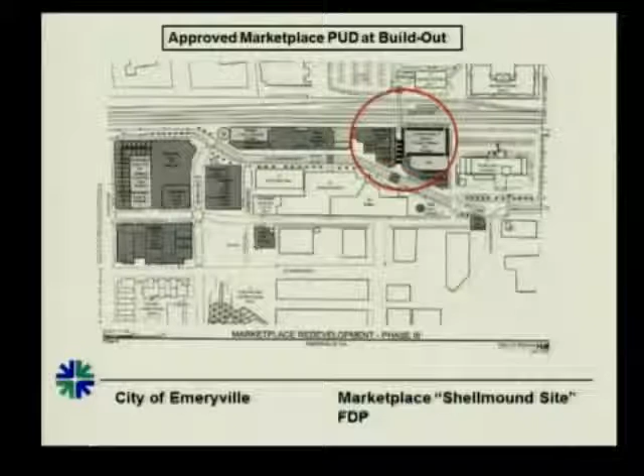Okay, good evening again. So this is Shellmound site, or Parcel A. The railroad tracks are right there, and you have the Shellmound Street. It's positioned in the approved Marketplace PUD at build-out, so it's fairly consistent with that in terms of location size. Everything, we've gone through that before.

So in terms of the changes that have occurred since the last study session, which occurred in January, the basic layout remains the same, and the basic circulation remains the same. So you've got Shellmound at the bottom. So there are two vehicular entries on the north and the south end, and the main lobby occurs along Shellmound.

As you would recall, we have about 14,000 square feet of ground floor retail, and a little under 200 units on top of that. And the building is divided. It's the same thing. The southern portion is 50 feet, and the northern portion is 70 feet. So, like I was saying, the circulation remains the same.

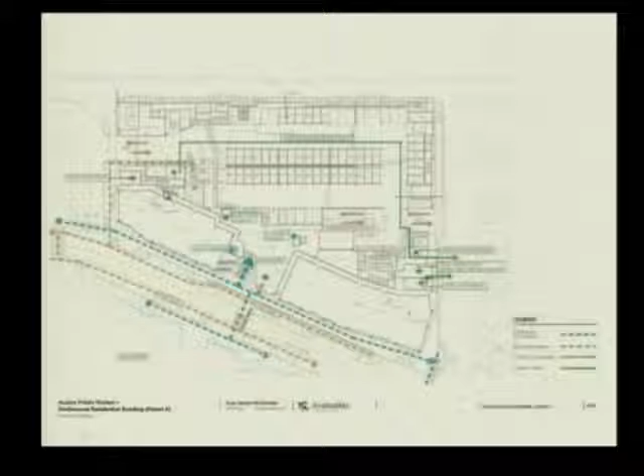We have loading and trash collection occurring on the northern end. The pickup and the loading will occur for both retail and residential on the southern end, and there will be room for trash on both ends. And the green line kind of shows how the trash would be moved from one end to the other.

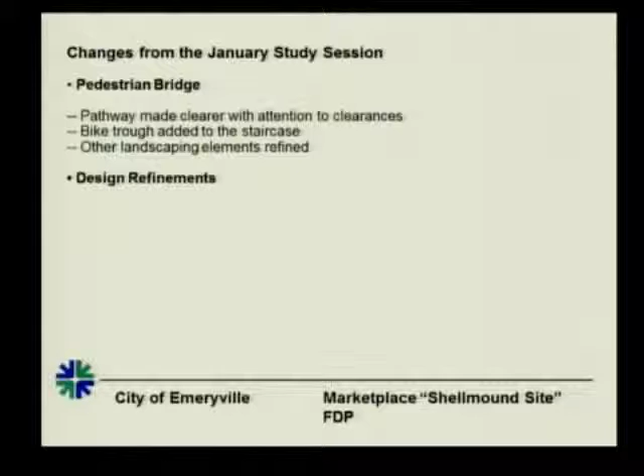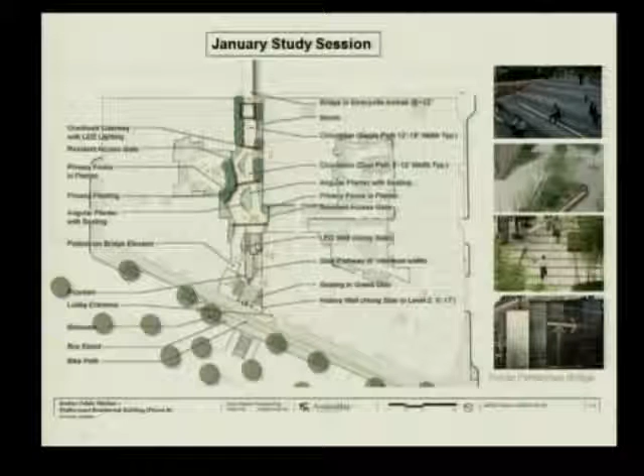So this was at the January study session. This is the pedestrian bridge. As you can see, here's the staircase. And one of the comments was that as you climb up the staircase, there wasn't a visual connection to the other end because of various landscaping elements. So that was one of the main comments, and this is also the January study session showing landscaping at the different podium level courtyards on the two buildings.

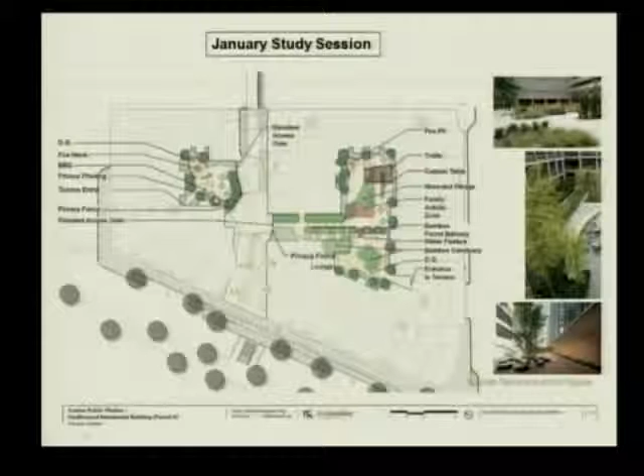These have been further refined, and so the current proposal is this. So here's the staircase. They've introduced the bike trough that goes all the way up the staircase. The seating on one side remains, and as you can see, the landscaping in between has been removed, and as you reach up, you have a fairly straight eyesight to the end of the bridge. Some of the other things remain the same.

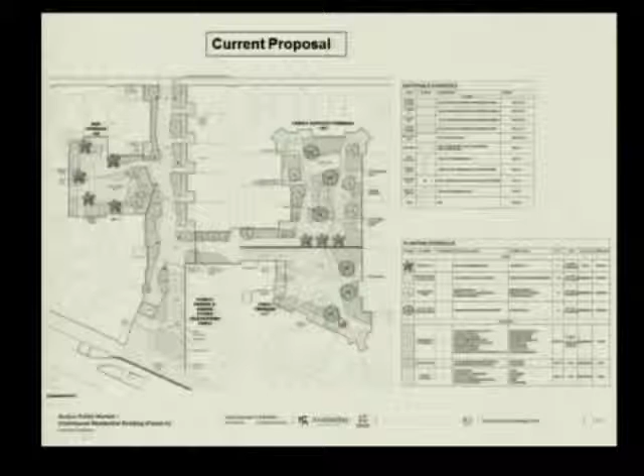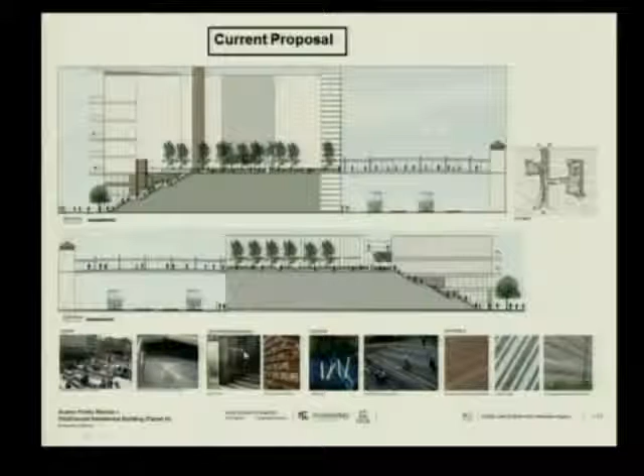These are 5 townhouse units opening up to this walkway, and here is one unit which also has a patio lining the walkway. There are more refinements in terms of the various species of planting materials, and also the different courtyards here. I'll come back to the courtyards in a minute. So here is the bridge walk, and the bottom tells you the images of the kind of seats that will be introduced, the bike troughs, the signage at the staircase level, some lightings, and the materials.

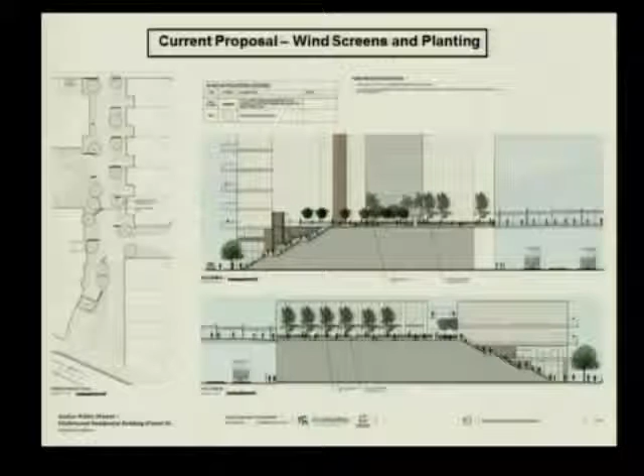What they have also added and changed since last time are windscreens. So these dark lines are the proposed windscreens, which would be about 8 feet in height, and about 30 to 50% porous. And the plantings also would be the kind that would mitigate winds along this corridor. So that's something that they have added and studied further. And I believe they're doing another wind study to nail down the exact species which would work to mitigate the winds going through this corridor.

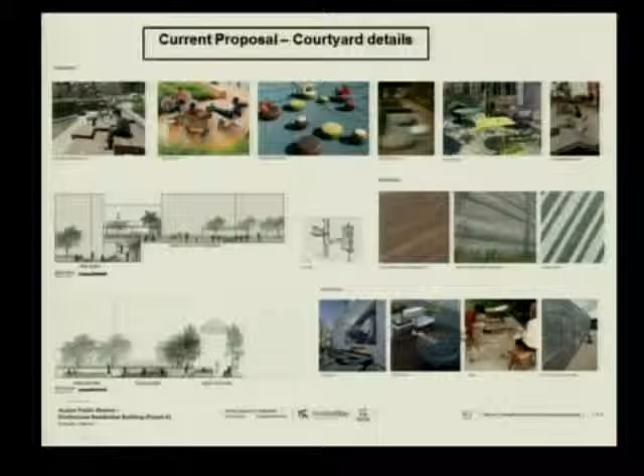So these are the different images for the various courtyards. They are starting to refine different play areas for children, different seating areas, and these are the images for that. I'm just going through it quickly because I know the applicant is going to go into further details. So the other change that has occurred since last time is in the unit mix. They have increased, so this is the evolution of the project over the 3 study sessions that we've had.

And so from the last time, they have increased the number of 2 bedrooms and 3 bedrooms, and you can see the numbers in front of your screens, and the overall unit count has also been reduced. In terms of the unit design, this is a work in progress. This was attached to your staff report, and it's kind of the comments.

Arnold has been working with the applicant in trying to get these designs where they are friendly to families, and some of them have been addressed. Some of them are, like I said, in the process, and they have also been changing their unit mix and increasing the number of 2 bedrooms and 3 bedrooms. So Arnold will continue to work with them to make sure that they are in compliance with the family-friendly guidelines that we've talked about this evening.

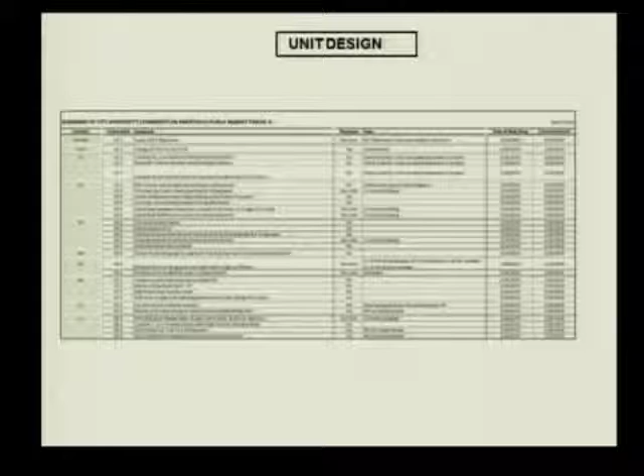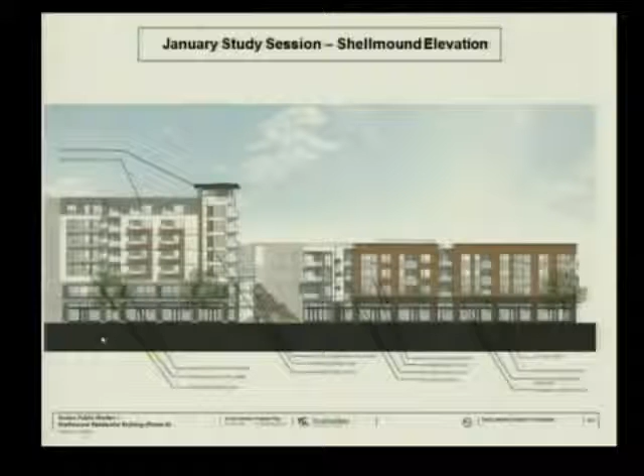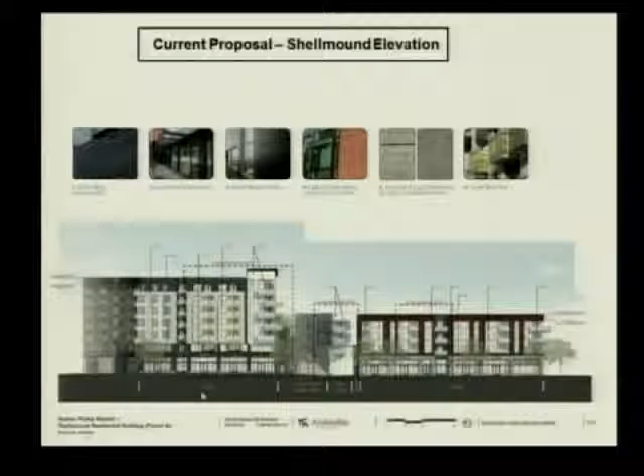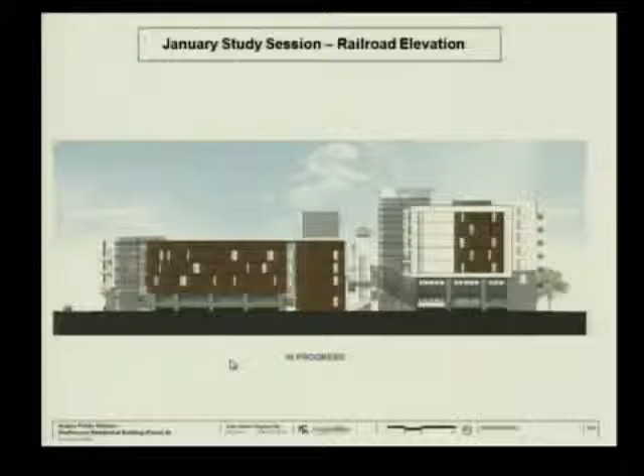And this is a more detailed view of that. And so you'll have dark brick here, and so that's the main change in terms of the design on this side. This is the railroad side. This was something they were working on, that elevation, and so the current proposal is this. So you still have the mix of materials. They don't change in terms of fiber cement paneling and plaster, as well as a bit of lap siding.

And what they have introduced here is they've worked on defining these 2 features, and these are a lattice kind of paneling with little signage here. If you recall, the public market sign that they had shown last time, that has been reduced by almost half. However, this sign may be moot. The city attorney informs us that this sign will not be allowed because this constitutes an off-site advertising of the public market.

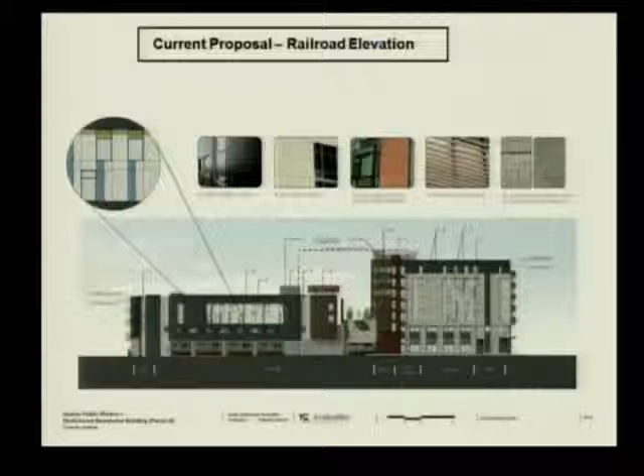Can you elaborate on that? I think since Mike is here, I'll let him... It's part of the public market PUD, right? Correct, but this is a residential building, although there is a portion of retail at the bottom. It's a separate piece of property owned by a separate property owner. It's an off-premise sign.

Okay. If it said marketplace instead of public market, since it all seems to be known as marketplace? So what is the marketplace sign for? It's really to advertise the retail component. Maybe the way I would look at it is advertising the neighborhood. Living in the area, I call every part of that parcel the marketplace. And I see it as interchangeable.

Hopefully when it's done, there's retail throughout the whole project. So I think if we didn't call it the public market, which is what that property is, and we call it the marketplace, it just tells people this is the neighborhood you're entering. That's the way I would look at it. We can look at that. Moving on.

So I take it that the commission likes the sign? I actually don't like the sign. Okay, then they can come back and defend it. And then, of course, if you don't like it, then the whole legal discussion is moot. Yeah, I'm not a big signage fan, actually. Okay.

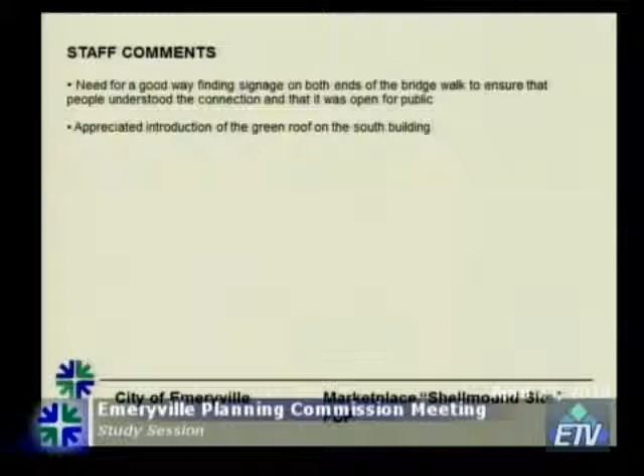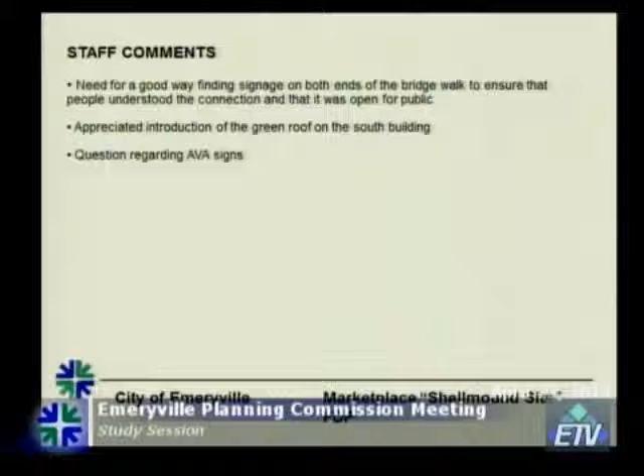So generally, the staff thinks that it's going in the right direction overall. Some of the comments that we had before was, the wayfinding signage would be important. We appreciated the introduction of the green roof on the south building. We had some questions regarding the signs, the AVA signs. I think it's more clarification in terms of are they illustrative, and if they are not, then what are the various details, but I'm sure that can be more defined in subsequent submittals.

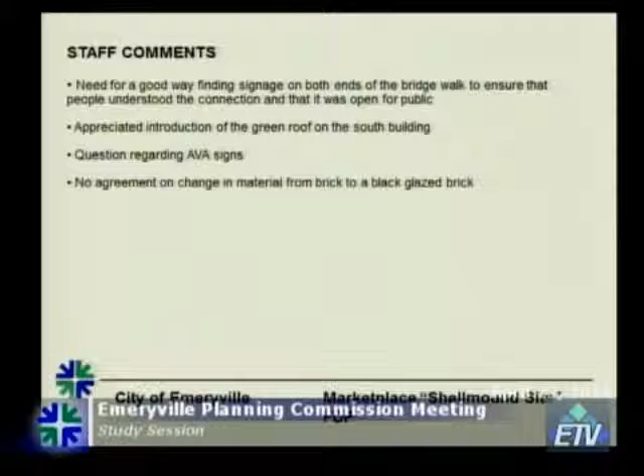There was no agreement among us on the change in material from brick to the black glazed brick. So something for you to think about and give your opinion on. And this is another comment from last time, that the public art component of the building would need to coordinate with the public art proposal under the Powell Street Bridge that is currently being implemented by the city.

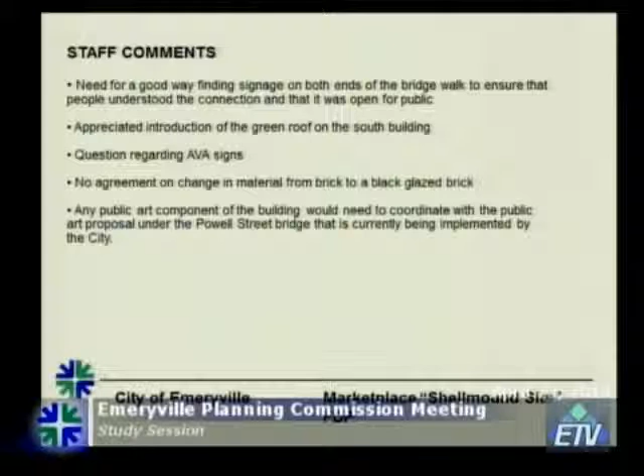So in terms of issues that the commission needs to give their opinion on, it's pretty much the same as last time. It's the proposed unit mix, as well as the design concept and the preference for materials, and any other issues that you may have. So I know the applicant does have a detailed presentation, but before they begin, if you have any questions for me, I would be happy to answer. Otherwise, I will hand it over to the applicant.

I have a couple questions for you. Sure. In the staff report, if not the email, it said that we would get the DCC comments on the dais tonight. How come we haven't seen those? Those were the staff comments? That's the ones you've given us? Yes. Okay. And is there a reason they didn't make it in the packet this time? That's not going to be a common occurrence, is it? No, it's not going to be a common occurrence. Okay, I figured there might have been something that hung up.

Also, the plans were very specific in mentioning that there were 167 units, and you guys said 170. What is the unit count? Unit count is what I showed you, which is 167. That was an error, I forgot to mention that. But the plans that you have are consistent with the slide I showed you, which is 167, and the unit breakdown is what I showed you at the slide. Yes, sorry about that.

I would also like to mention that I forwarded an email from Cindy Truelove of the Terraces, and a hard copy is on your dais as well. She's here. Oh, I didn't see you. She will talk about her email as well. It sounds like a lot of the Terraces' concerns have been addressed. They've got a couple of concerns regarding noise, which I believe the applicant is working with them on.

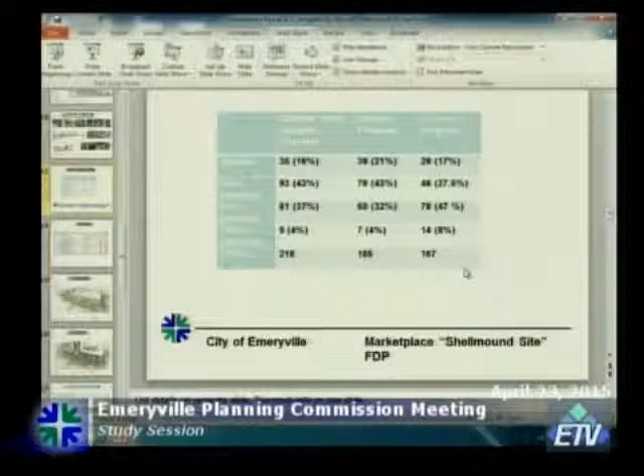So I want to make sure I understand the discrepancy about the unit count. So the table in our staff report was incorrect? Let me just get you. That's the difference. Oh, okay. So the last column for current proposal is incorrect in the staff report. This is the current breakdown, and that is consistent with the plans that you have. So the plans that you saw and are reviewing have this breakdown, which is slightly different from the one the staff report mentions. This happens when plans are being worked on, but apologies for that. Yeah, no problem. Thank you, Maru.

All right, so we'll invite the applicant up to give us a presentation. Good evening, Chair Moss and commissioners. My name is Nathan Hong with Avalon Bay. We're glad to be back. It's been a few months since we showed you this, but since we were here last, our team has worked very hard, listened to all of your comments, and made revisions to the drawings, which our architects will show you. And thanks, Maru, for clarifying. We did look at quite a few things, including those elevations as Maru showed you.

We have met with our neighbors and wanted to make sure that we collaborated on addressing their concerns. We have looked at the bridge walk and considered the bike trough and a lot of the other important points that were brought up, and most importantly the units. As Maru highlighted, we heard you loud and clear about doing more 2s and 3s, and this latest scheme shows we think we can work up to 55% of 2s and 3s, and we've also increased our three bedrooms.

Then finally, I know the whole family-friendly discussion. We have also worked with Arnold and took a close, hard look at all of the guidelines that were there before, and we've done our best to incorporate a lot of that with a diversity and variety of unit types too. So just wanted to open with that so that you knew our thinking on it, really wanting to work and cooperate with staff and the commission.

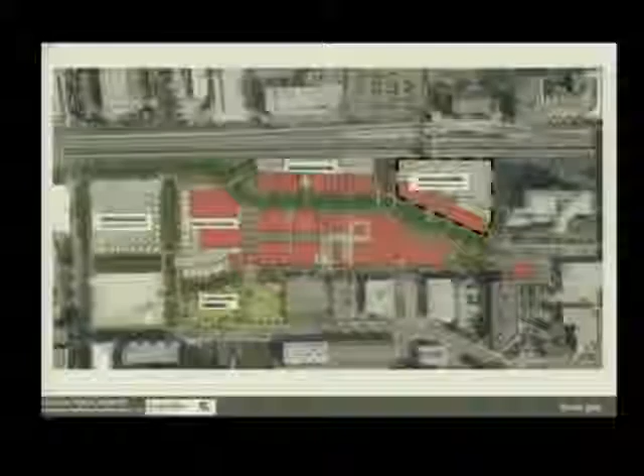So we're talking today about Parcel A, and as you well know, Parcel A is in the upper right-hand side, up in this upper corner. The study session for us tonight is Parcel A and Parcel D, or the theater site. First of all is A, and that is 167 units. As you can see by the site plan, we have retail on the ground level, parking behind. We're immediately adjacent to the railroad tracks and immediately across the street from the marketplace itself.

Last time we were here, we took away more than 6 comments, but primarily I think that we were directed to strengthen the southwest corners and add more playful balconies, and we couldn't agree more. That was something I think we kind of lost on our previous iteration, so we looked very closely at that. We further developed the east elevation, which is the elevation up against the railroad tracks. We also developed other elevations in flight as we were doing those iterations.

Also, the development of the roofscape and the elevation seen from the southeast, create a more direct bridge walk and add a bike trough. Also to develop and provide exhibits showing elevations along the bridge walk. And lastly, and very importantly, was the provision of more family-friendly units.

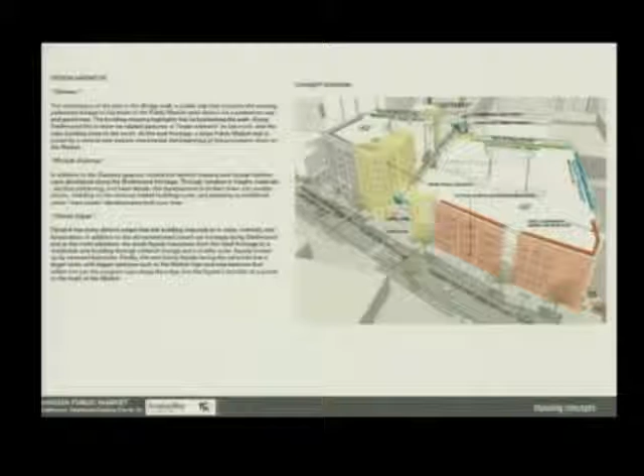So I'd like to start off with the overall big idea of the project. Once again, our office, our client, and I'm sure the city are interested in 360-degree design. So we don't have a front and a back to our buildings; we like to think of them as all important. We have taken this opportunity to break down some of the key and major components, like the gateway to the bridge walk and the entry portal to the public marketplace area. We've diagrammed these, we've talked about these before, and I think they came up in your package.

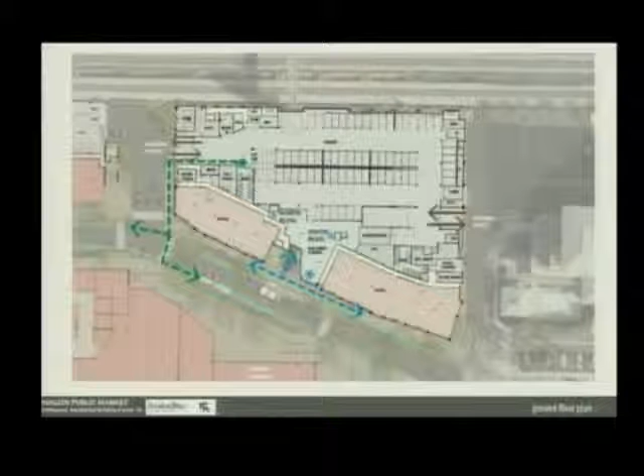The building itself is 167 units, 14,000 plus square feet of retail. All of our parking is contained on site behind the retail and one level above that. We have 2 entrances on either side coming in and out of the garage to ease circulation concerns. Also, the arrows give you some sense of the pedestrian circulation and the bike access circulation.

So first of all, we wanted to strengthen the corners. We took a very strong look. One of the things that we really liked an iteration or two ago is that we had some balconies that were very playful and asymmetrical, and they kind of moved in and out of the building, and it gave a really interesting quality to those corners. It helped lighten up the corners and made them interesting, and as you're coming up the street on Shellmound, on the lower right corner, you can see those balconies. We really worked a lot on the retail, the ground level, and the feeling of the pedestrian along the street.

And then on the west side, the important part for us was to create a landmark piece of the building that was a gateway for two things. One, it was a gateway for our building, which we thought was important. And two, it was a gateway for one of the most important parts of the building, which is the bridge walk itself. So we've worked really hard on those.

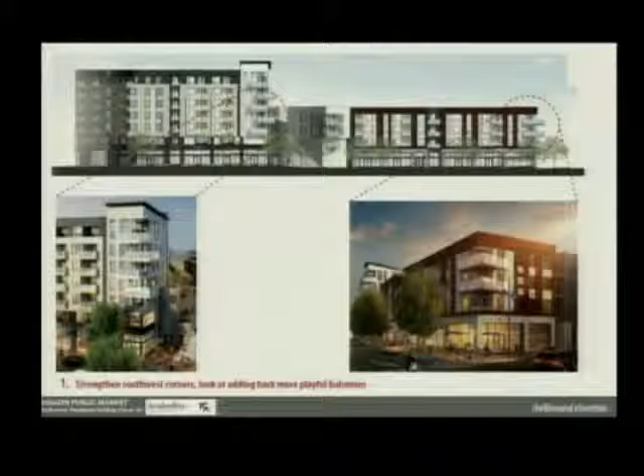This is a relatively good rendering of that bridge walk, with the leasing center down below. The right side is the 3-story building over the retail, and on the left side is the higher building, and what those corners would look like and how the bridge walk will feel, and it gives you a good perspective of the components of the bridge walk also.

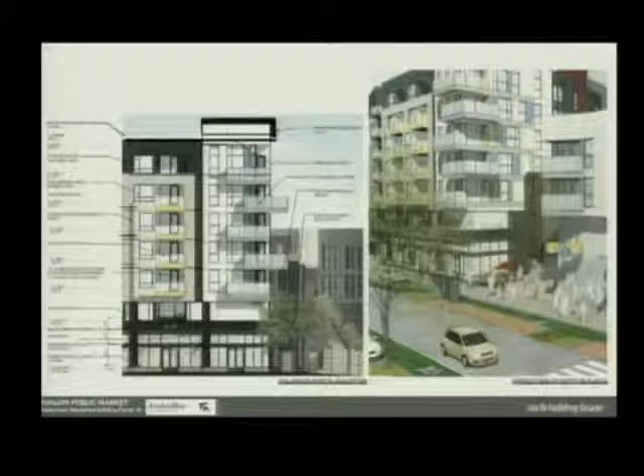Again, this is just a snapshot of the materials, the layering, the coloring, and the offset of the balconies to try and make that an exciting and dynamic corner.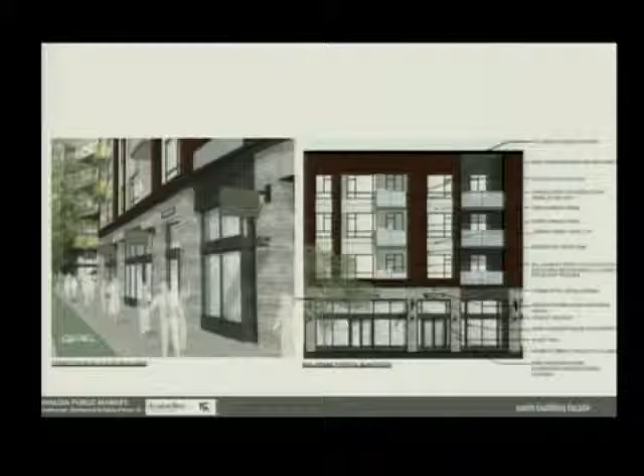And then on the retail level, our other concern was the pedestrian experience. So there are some changes in material. I know we talked about the glazed brick, but we're also utilizing all those other materials like metal and a cementitious panel and siding.

We really wanted to work hard on the retail level to make it an integral part of the experience at the street. So this gives you a shot from the southwest corner, showing those balconies up above, the enhanced storefront, the steel awnings over the windows, and then that outdoor plaza opportunity at the corner.

The east elevation is a real challenge. Obviously, there's reasons. We have a railroad across the way. We're very concerned about sound. We're concerned about the visibility of this side of the building from our neighbors. I think rightfully so, this side of the building needed some work.

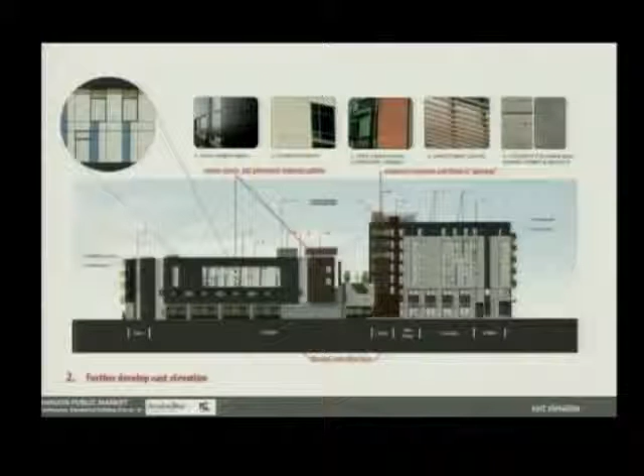We think we've done a pretty good job of delineating a more articulated, colorful, material-rich building on this side. We've actually wrapped those materials from the front and from the sides around to the east elevation and incorporated those in a different way to create a strong element on the bridge side here.

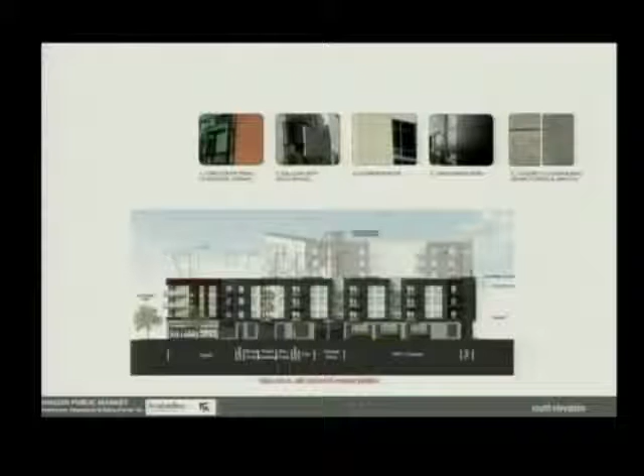We do have a materials board. Yeah, they've seen it. It's been passed around, so it gives you a sense of some of the ideas of the materials that we're anticipating using.

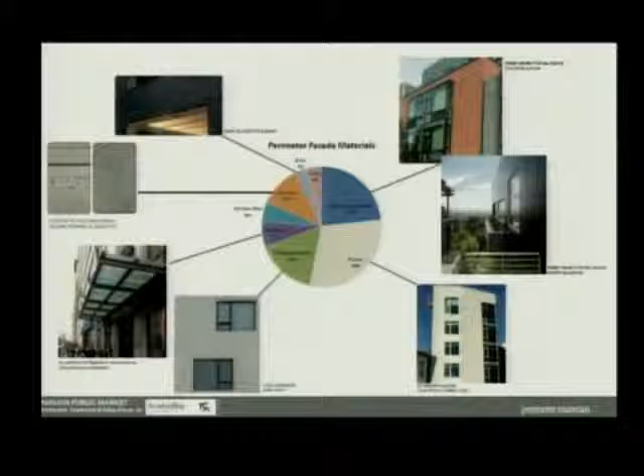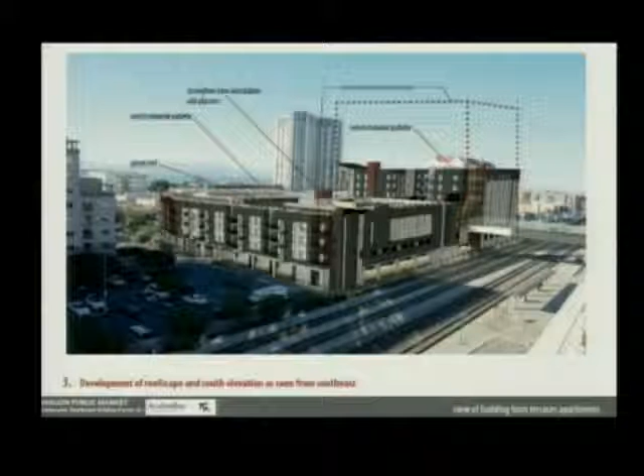On the right, the building was allowed to go to, I believe, 140 feet. We're currently at between 80 and 85 feet, and we're well within the framework of the height limitation here also. There are some things that we took into consideration on this side of the building also. I think we might get to it later, but I want to mention it now.

We did put a green roof on the building. It's a pretty expansive area, and I think landscape can talk about that. And we also put a roof deck on the far corner of the smaller building.

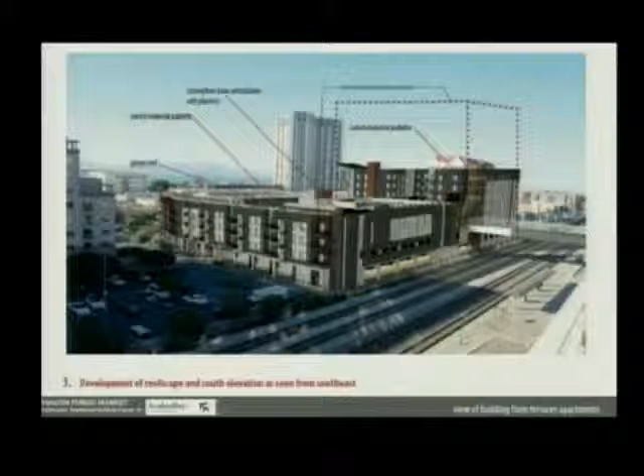The bridge walk. There's two or three things that were key to the bridge walk. One was the addition of the bike trough. We actually had a bike trough on it, but we didn't show and illustrate it. We went back with landscape and the ownership, and we really worked on getting the bike trough to work, so we have both an up and a down bike trough.

Another consideration was the width of the bike trough and the path of travel. So we simplified it, but we tried to keep some excitement. We have some benches and some seating. We have planting. We have different pavement textures. Landscape's going to talk about that.

But we tried to make it a direct approach. You can pretty much draw a straight line from the stair right to where the bridge ends at the site, and then also a direct approach to the elevator. So we worked hard on that, and we think it's a good improvement. And we look forward to showing you that in the landscape plan also.

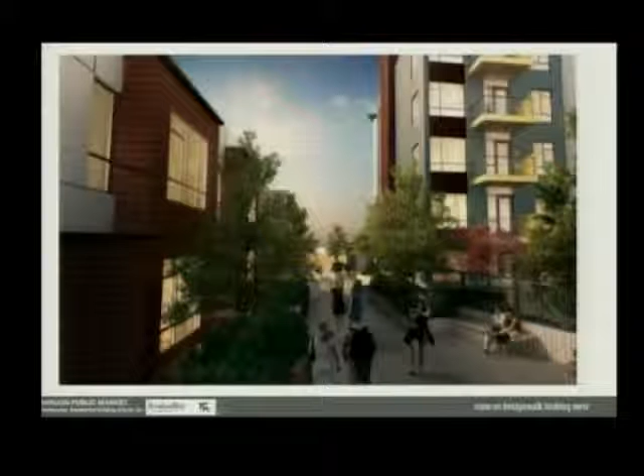This is what that would look like if you were coming off of the bridge and working your way through our project and heading towards the marketplace. You had also asked, what do some of the interior elevations look like? Are we going to just stop at the exterior and then let the interiors go?

So with that, I know this doesn't look like April Phillips, but a very qualified individual. Hi, good evening. My name is George Lowe, and I work with April Phillips Design Works, and I'm filling in for her this evening. She's at a board meeting in Washington, D.C.

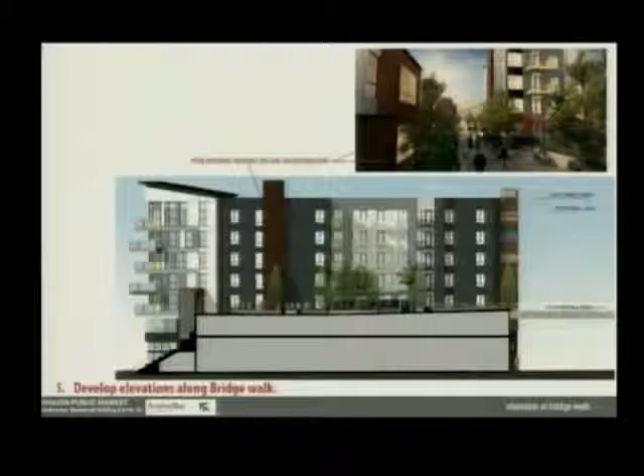And then integrating stairs and benches and opportunities for people to sit down in key locations and see what's happening, and gathering opportunities, which also happens on the main stairs. Those were all part of the activation of the space. Down below, the seat walls at the bottom left in the patio that fronts the elevator now turn that corner so people can sit there, whether they're using the retail establishments, waiting for people, or just watching people walk up and down Shellmound. So that was part of an activation agenda.

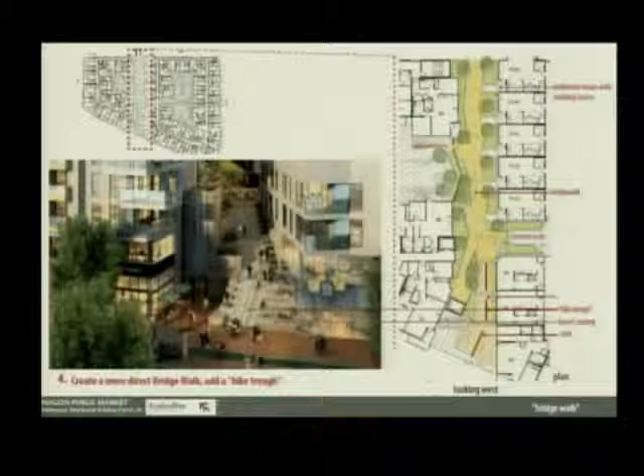Another thing that Maru spoke to earlier was the wind. We want to make the space comfortable, safe and inviting. So we are working with a wind consultant, and we've had a couple of back and forths with them already to look at how we mitigate the channeling of the wind through the space. That's done partially by the use of trees and vegetation, and partially through the introduction of wind screens, which have a recommended height, porosity, and spacing. We're going to work through all of those details with the wind consultant to make sure that's not a factor in people's enjoyment of the space.

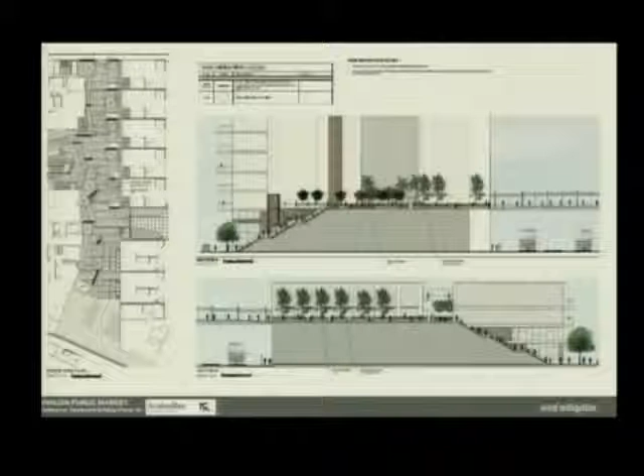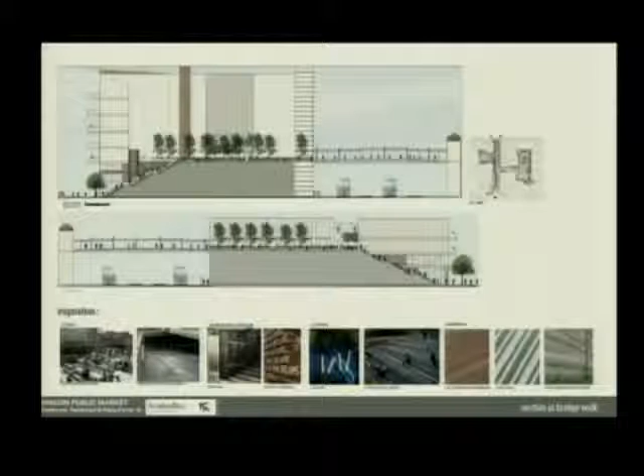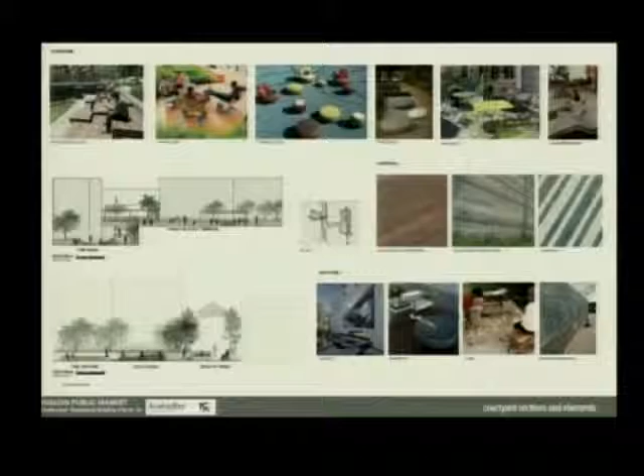And then just briefly looking at the individual podium spaces, there are different opportunities for barbecue and sitting around informally. There's a game space. The terraces, there's 3 different levels. So, going back and forth a bit, but you're seeing what's called the Sun Terrace on the left, a family activity terrace where there's a barbecue and a child's play space, and then what's called the Chill Terrace, where there is an opportunity for projected movies on the walls, and lots of movable furniture and lots of opportunities for people to sort of create their own experiences in these spaces and adapt the space to what they want it to be.

And that is pretty much it for the landscape changes at this point. Thank you.

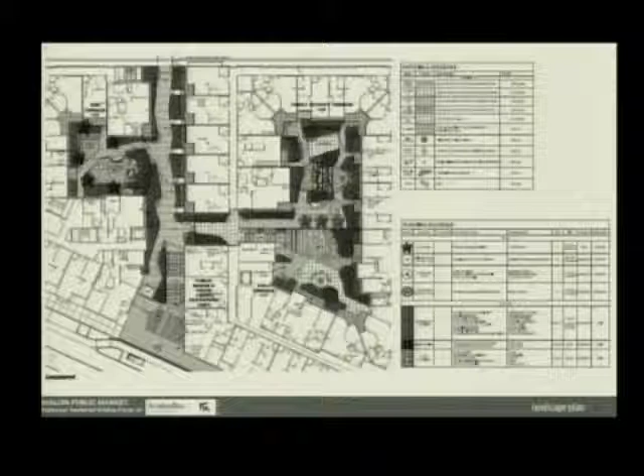I think I went a little too far on my slides back there.

So, family friendly. Last time we presented to you is the building on the left. At that point we had 31% 2 bedrooms and 4% 3 bedrooms. And in those percentages, I would think that the family-friendly quality of those units had not been taken to the level that we have taken them to today. Not all units are family-friendly in this project. This is a project that has a diverse mix that accommodates more than families. It accommodates lots of people, but I think it has a very strong sensibility to the needs of a family-friendly environment.

On the right is the new mix, and the light tan shows the diversification of that mix, and the new 3-bedroom, 2-bedroom total is about 55% versus the previous 35%. This has caused a reduction in unit count. So, as you pointed out earlier when you looked at the reports, we've gone from 185 units to 167 units to accommodate the increase in the 2- and 3-bedroom units.

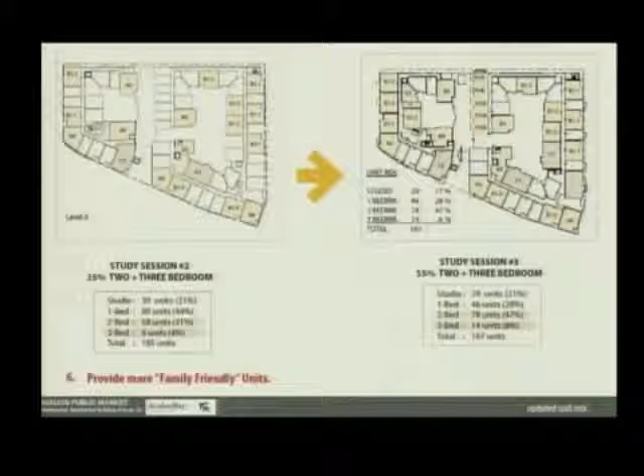And the key components of those are dedicated dining areas, in-unit storage for strollers, bikes, trikes. We don't have any way to make the child put the bike in the closet, but somebody will figure that out. Side-by-side washers and dryers wherever possible. Separate sleeping areas from the living areas by the creation of some hallways and adjacent spaces. Minimum of 60 square foot decks or patios.

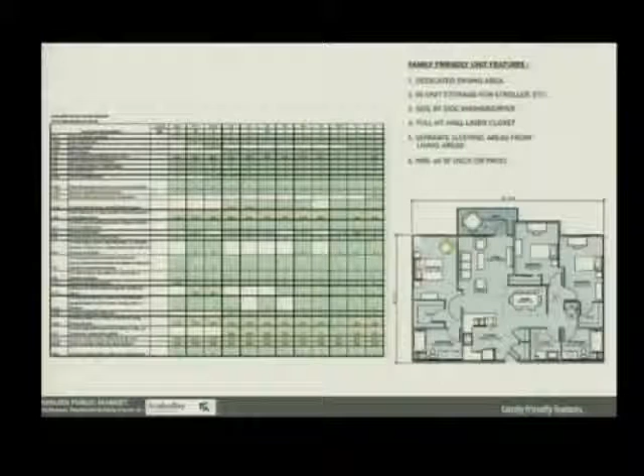I know there's been a lot of discussion tonight about the family-friendly components. We have, I think the word is striven. We have attempted to incorporate as many of those components as we can, working with staff and with the staff architect consultant. That's the project rendering I showed you earlier. And I'm open for any questions if you would care to ask them.

Is the commercial space suitable for a restaurant or food service? It most definitely is. The bay depth of the commercial space is suitable for a restaurant. It has a back hallway corridor to service things like food and trash to get it out of the restaurant space. We're certainly hoping and designating the two major corners, north and south. They have an outdoor widened patio area that they could use for an indoor-outdoor dining experience. I think the alcove here at the stair immediately around that corner shares that same indoor-outdoor patio opportunity. I think this is ripe for restaurants, but also would accommodate other retail users as well.

So there's shafts? Absolutely. We've dialed that in with the retail developer and our owner, and all of those accommodations for air conditioning, shafting, and all of that have been accommodated, yes. As well as delivery, which is always a big thing with retail.

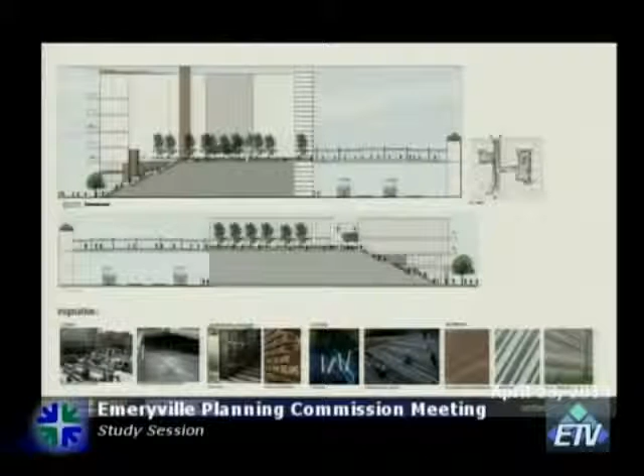Okay. I just was wondering about, obviously the rail's going to have posts supporting it. I think the trough itself, it's a foot wide. So the post is going to be in the middle. The trough should be easily 5 inches on either side. You can see in the second from the left photo there's an image of a bike trough. It's got two-way, and you can see that there would be room to put the railing down the middle of that. And there are others where it showed on the side, and you have a railing directly above it. I'm sure you'll figure it out.

Yeah, I had a similar question, so I think when you guys come back for your approval, it'd be nice to have some photos of some examples. I was thinking of a mock-up for an actual bike trough. Just bring that thing in here with a rail on it. No, I agree, 100%. The last thing we want to do, and you do too, we don't want to build something or convince you of something and then not have it work. That's not going to help anybody. And bicycles are an important part of our lifestyle, so absolutely.

So just going back to the walkway and the landscaping aspects of the walkway and the windscreens, I'm assuming that you are really looking also at sight lines for safety and visibility. You mentioned having lights and some degree of porosity in the windscreens, but I'm hoping that they're not going to be creating places where there's opportunities for lurking.

Well, the recommended height for the windscreens is 8 feet from the base of the walkway itself. And the idea is that where they're shown would actually be in garden beds. So they'd be starting up a little bit higher, and then they would be off to the side, so they won't be obstructing the view corridors any more than the planting really. They're a bit higher, but they won't be coming into the space more. But again, that's definitely something we'll keep in mind as we work to figure out exactly where they should be located. That and the heights of the planting as well.

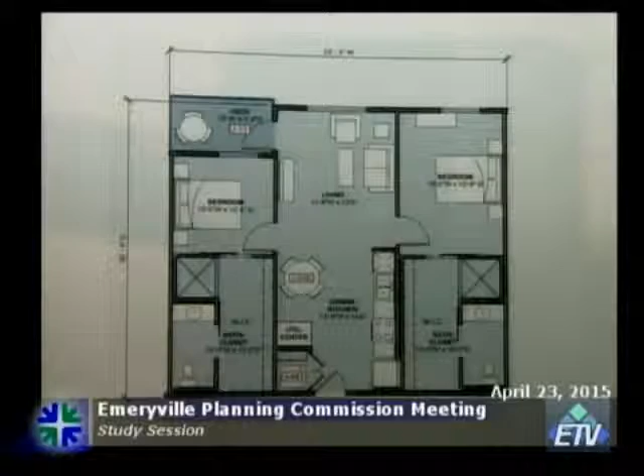You'll remember one of the main salient points of the document you just said yes to, whereas the bedrooms don't open onto living rooms, dining rooms, and kitchens. And you'll see here, I've gone through this a couple days ago and today again. Virtually every single unit, 2-bedroom, 3-bedroom, the bedrooms open right onto the living room, dining room. A lot of times you have to go through a dining room or living room to get to the bathroom.

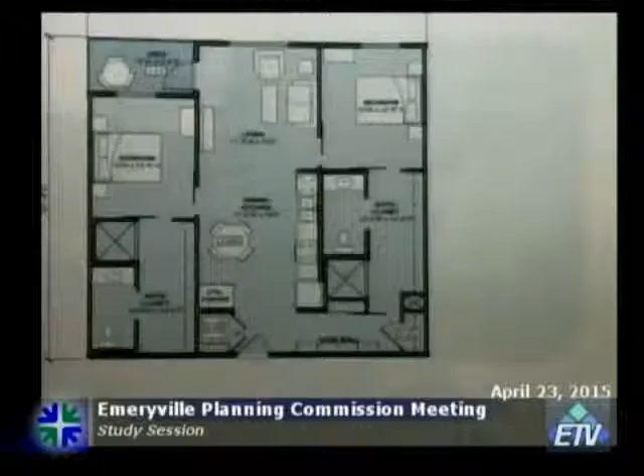Here's another one. I mean, it's just chock-a-block. Almost every single unit plan has that characteristic. So it's completely counter to the document you just said yes to for family-friendly housing. So the developer here tonight just told us that this is a family-friendly project, but of course he would say that. So I posit to you that maybe he's wrong for whatever reason, but no reasonable person can say that this development comports with the document you just said yes to tonight.

And so just a warning to the Planning Commission, you don't want to embarrass yourselves, I would think. And so I would say, if you say yes to this and yes to the other document, it'll make you look ridiculous. So let's have the document you just said yes to have some weight, please. In addition, I wanted to say, once again, it's drive-in, drive-out, podium, not family-friendly.

There's nothing said by the developer regarding the retail. What we want is locally serving retail that's not formula retail. There's been nothing said about that. What we're going to get is either empty units or formula fast food. We need this in writing from the developer, the type of retail we're going to get. So you need to get that in writing. If we just leave it up to the marketplace, we're going to get something that we don't want. How do we know that? By our history here in Emeryville.